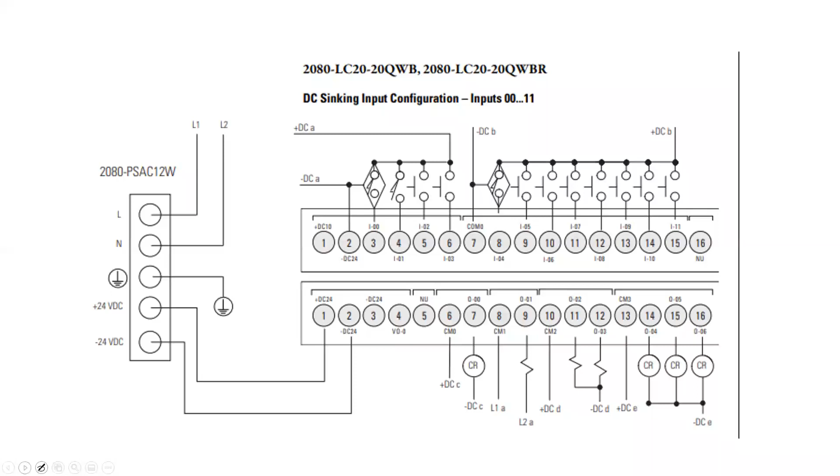Oops, let me see if I can get my pen. That's not nice. Pen will not work on the other side. Oh, there it is. Wonderful. All right, as I figure out where I am on the screen.

All right, so we had to wire 24 volts, right? So we had a power supply, 120 volt AC, and then that meant you had to come into those 2 terminals right there. And that was straightforward. And then on the inputs above, we had the switches wiring up here to pins 3 or pin 2. So what I wanted to talk about is what that really means and the other labs, right? We just left it with that. You wired up one switch, you wired up the power, and away you went.

So let me try to, and now realizing my drawing might be pretty bad here. Oh, okay, I think I see what's happening now. All right, so first lab was pretty straightforward, right? We had an input push button, we called it, I think, start. And we had a stop push button. And then we had 2 outputs. We had, I believe it was like a pump, like the motor starter. And then we had a pump running indicator, right?

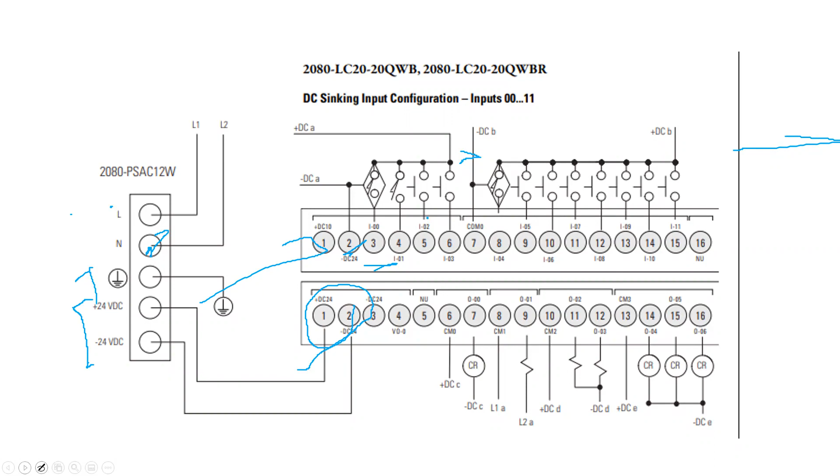Then we had our individual inputs on the PLC, and we had our individual outputs on the PLC. And going back a slide, we were referencing those as simply 1, 2, 3, 4, 1, 2, 3, 4. So I'll use that 1, 2, 3, 4, 5, 6. Now, being that the power was on 1 and 2, I'm going to start this side with 3, 4, 5, 6, 7. All right. I probably could have skipped 1 and 2 there, perhaps.

But 3 is where our first input was on the Micro800. So this start switch would be wired to pin 3. So we would come off this rail, go to the start push button, and wire it to pin 3. Then we showed we had a second push button, which was our stop.

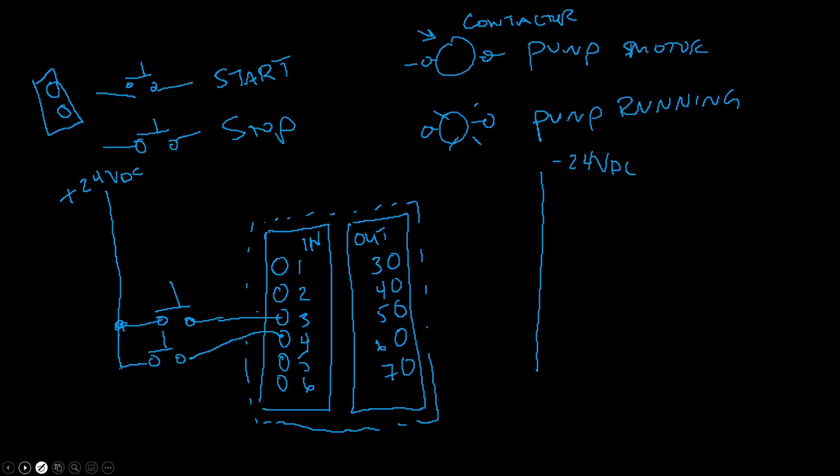Now, we can choose to wire this to any input that we want. Logically, it seems like we would put it to pin 4, right? That's the very next input. It doesn't have to go to pin 4. It can go to any pin you want, as long as you keep track in the program of what it's actually wired to.

So again, if I'm making my schematic, I'm going to label these devices, because at some point this would be a CAD file, of course, and not this horrible chicken scratch diagram. You'd have a CAD file that would show this neatly, and you'd be able to take this out to the panel and look at what's actually wired to the PLC.

All right, now for the outputs, we do the same thing, just a little bit opposite, right? The outputs are what's called sourcing, where the output is sending 24 volts out of the card, and then it's going to go to the negative rail to complete the circuit.

So we would actually come off this terminal 3, and we would indicate this as a coil, since it's a contactor. And then on pin 4, we would come off of here, and we would indicate this as an LED or a light, and we'd come to the rail. So this would be our, I'll call this pump, and I'll call this

run for short, okay? And then the LED, of course, will have a color, so we typically indicate the color inside this circle. So let's say it's a red light. So I'd put an R there to indicate that it's a red LED. All right, so if we were going to really wire this up in a panel, this is how we would have done it. Then the next piece, of course, was what you did in the program.

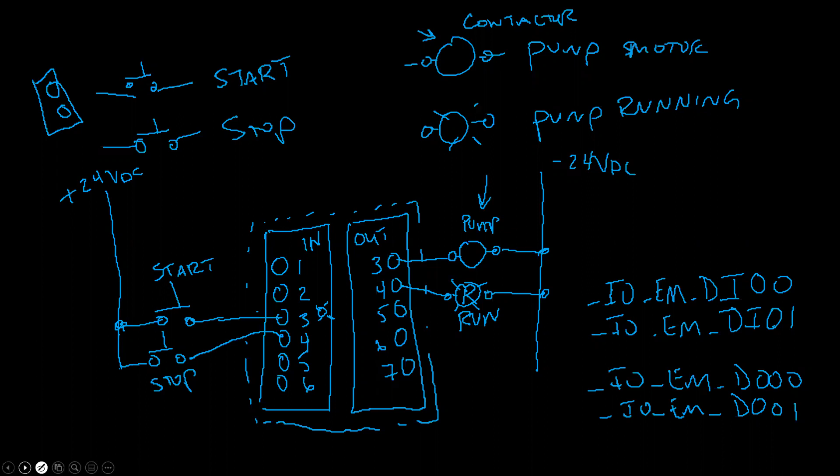Because we just wanted to do a simple pump control situation. So just starting this pump took kind of 4 things, right, in this situation. But that's not all of the story here, right? Because the pump contactor, which is basically this relay coil right here, is just energizing a coil. So we still have to interface that contactor to the motor, all right? So this is, again, what the PLC is doing. And inside here is the magic of the program you wrote, right?

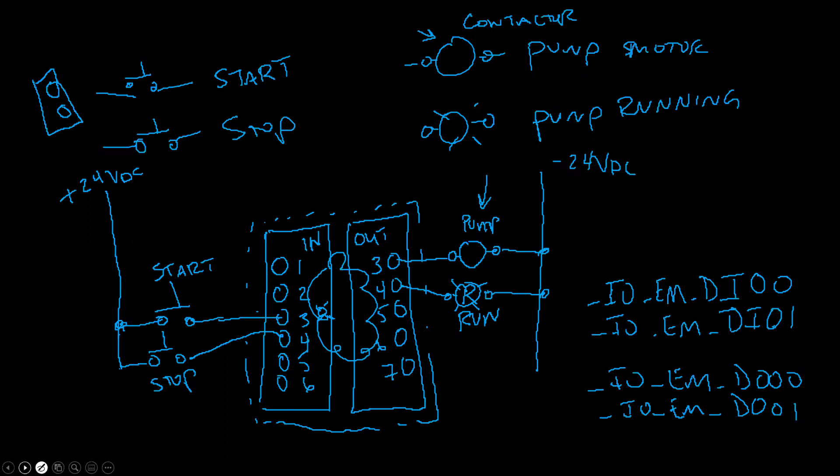But you still have to interface these external devices, perhaps with good old-fashioned wiring, okay? So start and stop push button, there's not much else to do there, right? You just wire a push button in the PLC. The run LED, the run indicator is pretty simple. You're just going to wire it, and when it gets power, it lights up. But the pump contactor still has to be wired to the pump or to the motor in order to make the pump turn. So let me just show you what that looks like real quick,

because it's important to understand. So again, we have a contactor. Typically a contactor has this coil, and I'm going to draw it as kind of a device here, like that, right? So we have a coil, which was going back to the PLC. That's what the PLC was actually wired to, as a coil. But the contactor has 3 contacts on it, and this is used to go to a three-phase motor. So we're basically going to have A phase, B phase, and C phase for the three-phase motor.

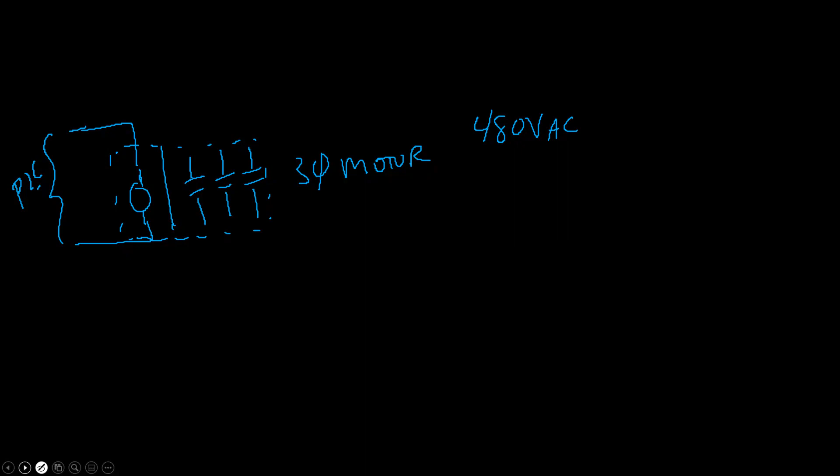Now, let's say the motor is a 480 volt AC motor, and let's say it's got a particular horsepower to it, right? So when we're sizing a motor, we have to pick a motor that has enough horsepower to basically spin the load or turn the load, right? In this case, it's a pump. So I don't know, I'm just taking a number. Let's just say it's a small pump, a one horsepower motor.

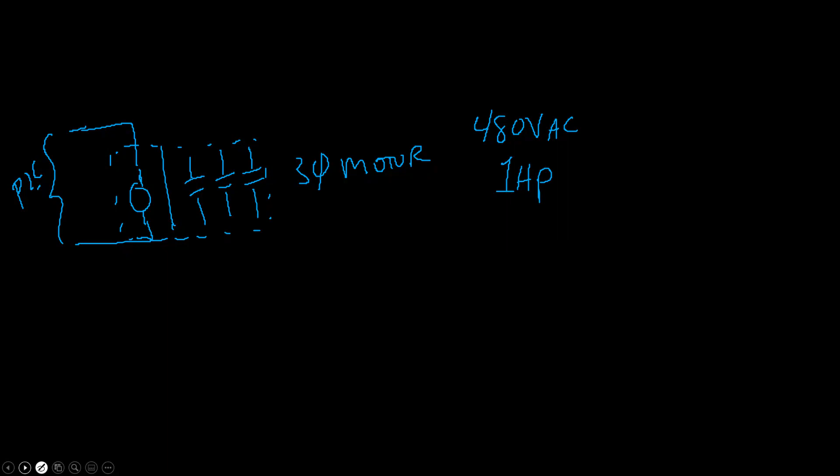And the reason why that matters is because these contactors come in different sizes because there's a current draw. Okay, so horsepower can be related back to watts, basically, which of course can be related back to current. So we have to size our contactor to be able to handle the amount of current that motor is going to draw. If you put in a contactor that's too small, then that contactor is probably going to melt. Those contacts would melt together, most likely.

And if you put a contactor in too large, well, that's not a problem. But then you probably spent more money than you had to, and you put a physically larger device in the panel than you had to. Nothing wrong with that, but it's just oversized.

Okay. So being it's a 480 volt motor, right? This is 24 volt DC on the contactor coil, right? But these contacts themselves are 480 volts. So we would never bring 480 volts to the PLC itself. So if you're sitting here wondering why didn't we just bring that through the PLC? Again, two reasons. One, 480 volt AC, we would not do that to the PLC.

And two, the current draw, because this could be 10, 12, 15 amps. It could be considerably more current draw if it's an even bigger motor. And our PLC cards, those transistors on those PLC cards, typically are rated for a half an amp. So you would blow that PLC incredibly quickly when you turn this motor on. So we have to use this external contactor to do it. All right, so just wanted to kind of show that piece of it.

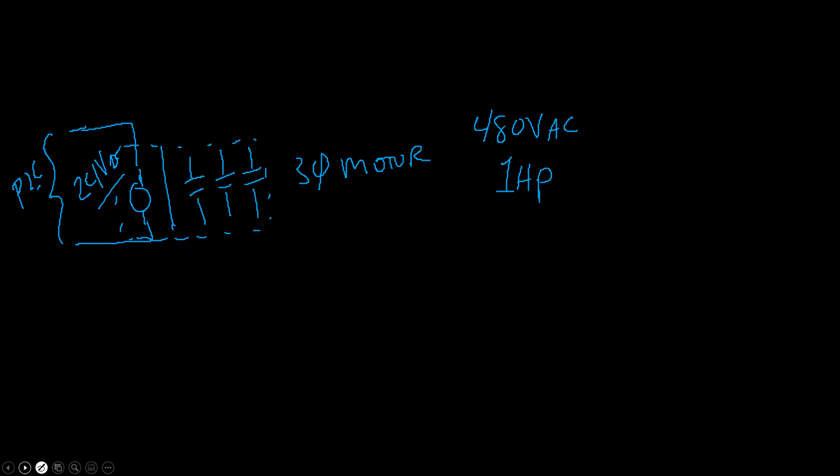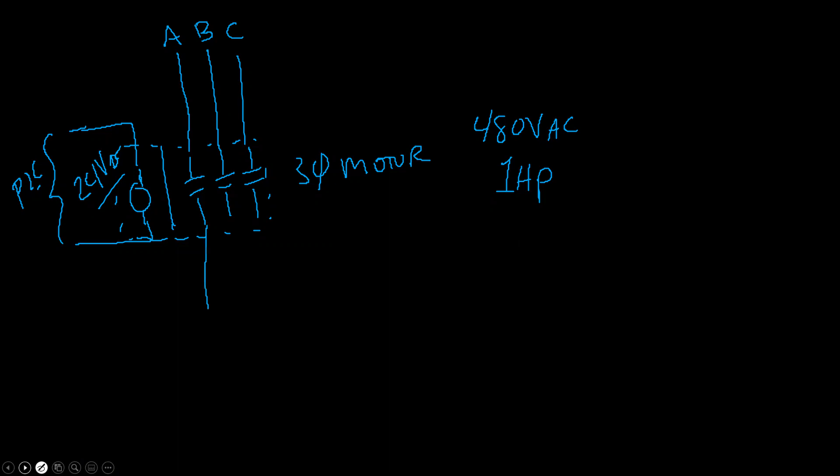Of course, we would have our A, our B, and our C phase come into the contactor. When this coil energizes, or when the PLC told it to turn on, these contacts close, and they're all tied together, so they all close at the same time. And then here, we would come out of the contactor, and we would have a motor. And we typically show the motor as just a circle with an M on it if we're drawing a schematic. And then we would, of course, label this, right?

Whatever it is, motor 1, we'd give it the rating, 480 volt AC, 1 horsepower typically, and we would say 60 hertz, even though it's implied, anything in the United States is going to be 60 hertz, but it's still best to define it when you're drawing this schematic so that we know that it's a 60 hertz system and spell it out. Okay, so from an electrical standpoint, this is what we need to do to make that pump turn.

Now, there's a mechanical piece to this because the pump implies that it's pumping a fluid of some sort, right? So there could be a physical pump attached to a piece of pipe that's going to be pumping some kind of fluid. Typically, as an electrical person, we're not going to be involved in that aspect of it. So that's where a mechanical engineer might come into the project to size the pump properly and to design the piping that would take whatever fluid you're pumping through the system. If you're in a chemical plant, it could be pumping hazardous, dangerous chemicals. Again, that's not really inside of our electrical wheelhouse typically. All right. So again, lab 2. Any questions on that? Just wanted to help show that to you.

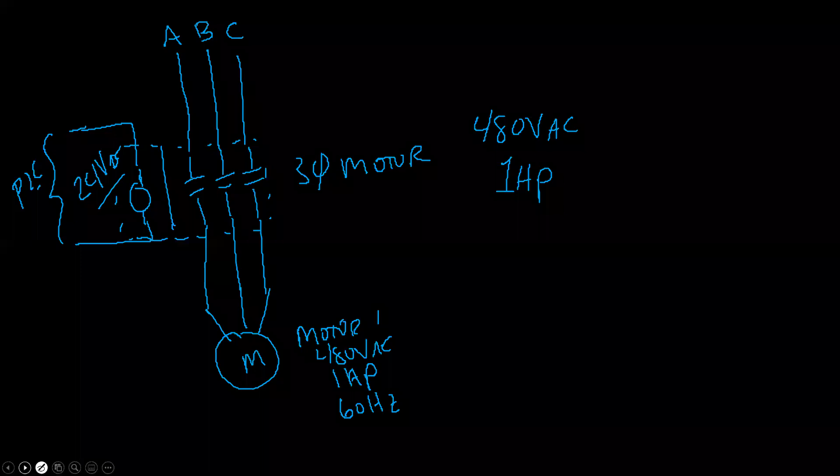Oh, okay. All right, so going on to the last slide, the one we just did. I guess that was Thursday night, right? Today's Tuesday. So that one was a little different in that we didn't have a motor this time. Well, I guess we did have a motor, because we had the belt, the conveyor belt motor. In that case, the conveyor belt motors are going to probably be very small motors usually.

If you're driving like a belt, like on a big grain elevator, if you've driven on River Road and you've gone under the grain elevator, you see those kind of belts that bring the grain out to the barges or ships on the river. Those are going to be pretty large motors driving that belt. But if you're thinking about a conveyor belt that's inside the Amazon warehouse moving packages, those motors wouldn't necessarily need to be that large.

But in that case, we had several different inputs, right? We said we were going to have a photo eye sensor, so I'll call it photo eye 1. We had a photo eye 2. Then we had a start and a stop for the conveyor. And then of course we had the conveyor motor, and I don't remember everything we had, but probably had a light. I'm sure we had an indicator of some sort. Okay.

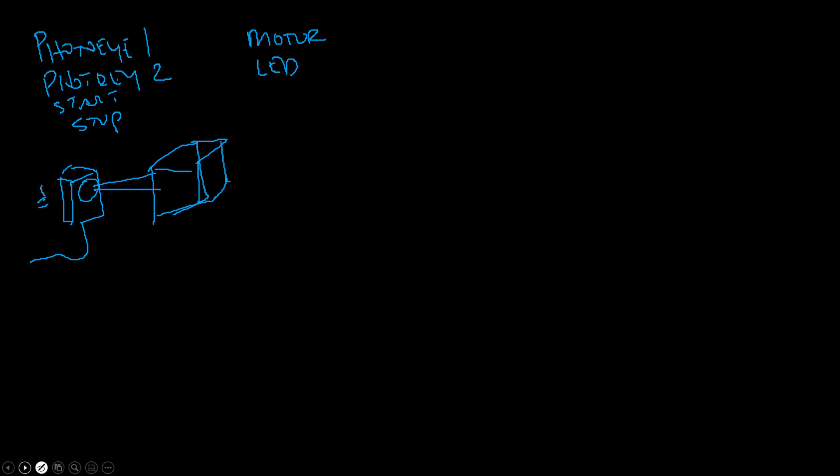So for the photo eye, a photo eye kind of looks like this. You have a little kind of light sensor, and you have a kind of cord going off, right? It has a little light beam going out. And if the box breaks the light beam, then again, there's a set of contacts inside of there. The contacts close, and there's 2 wires coming to the photo eye, right? So an in and an out, right?

So that was the contact closure, and that of course is what we would be wiring to the PLC, so that when the box comes by the photo eye, it detects it, the little contact closes, and then the PLC sees that as a high signal or a 24-volt signal, and therefore shows it as a 1 inside the PLC, right? So our wiring diagram would be exactly the same, right? We would show the inputs and the outputs, right?

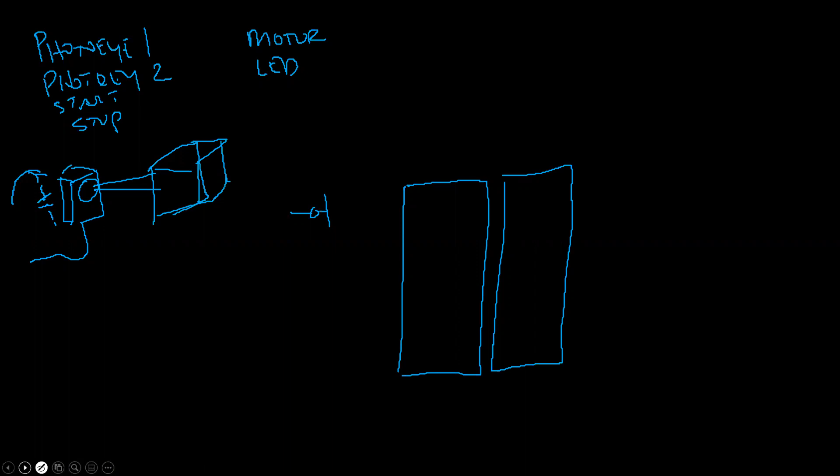Now in this case, we would draw it one of two ways. We either draw it as a contact like that probably, or we could also show it as a switch maybe. We wouldn't show it as a push button, right? Remember, we have these standard symbols, right? That's a push button symbol, not drawn very well. And then remember we had some other symbols, right? We had a float switch. We had a flow switch. We had a pressure switch, and then we had a temperature switch, right? So it's important to understand and recognize these standard symbols.

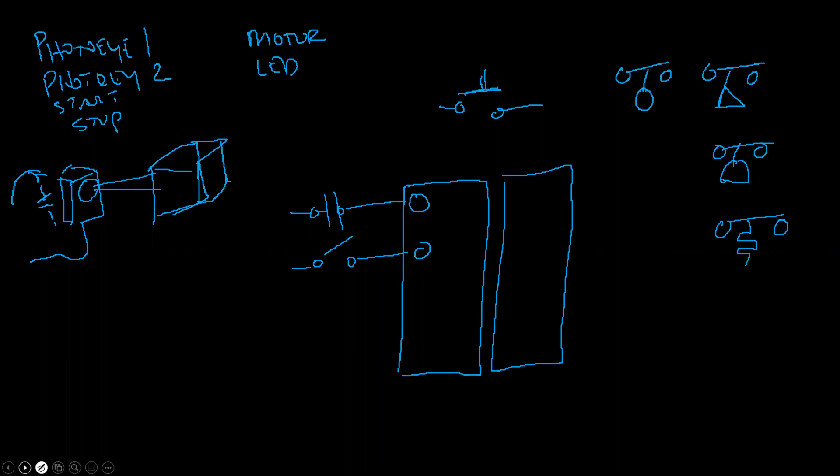There's an organization called ISA that publishes a lot of standards for the automation world. And these symbols come from an ISA standard. I think it's ISA 5.1. So all these schematic symbols are standard. So it's important, again, standardization, because no matter where you work, you can pick up a drawing and hopefully they're using standard symbols so everybody can recognize. Just like speaking English, it's just a way to make sure we're all kind of using a common language, so to speak.

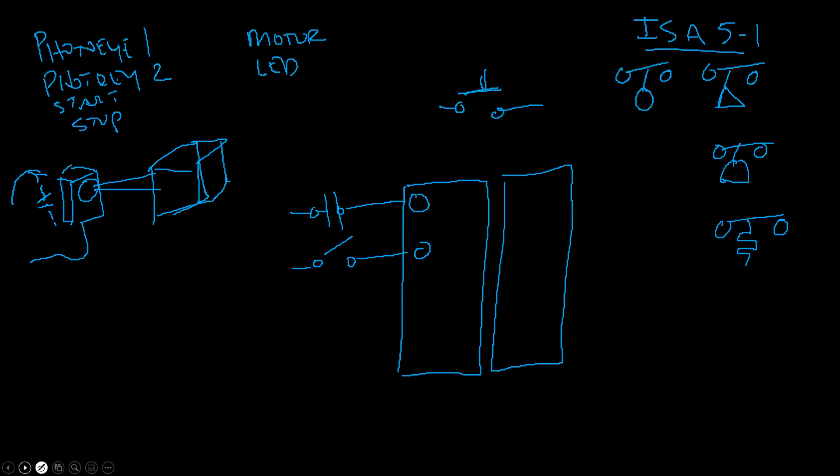So for the photo eye, I don't know if there's a standard symbol for a photo eye, I have to look that up actually, but it would probably be drawn as either a contact closure or potentially as a switch, possibly. Then again, 24 volts plus, right? So this is actually a 24 volt power, right? So 24 volts would come into the photo eye, right?

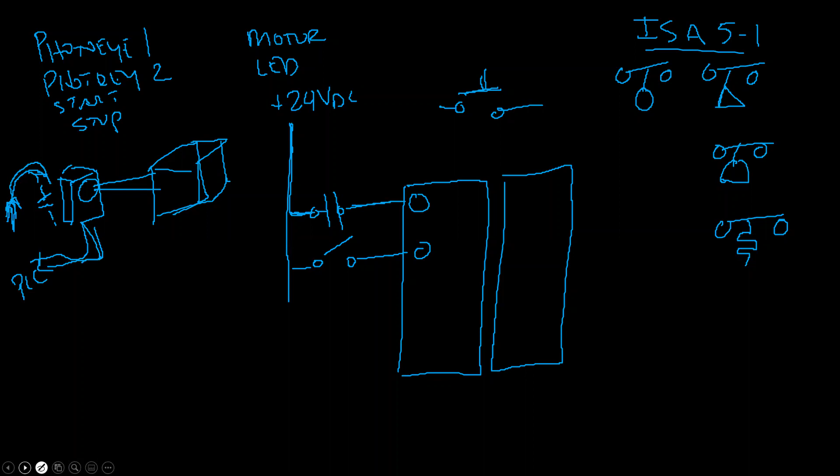And then when that contact closes, this goes to the PLC, right? So that's this wire here. And then that is that wire here, right? So that was 3, 4. And then we had our start and stop. So we would draw that as a traditional push button.

And of course, very important to label all these things. And then same thing on the outputs, right? We would come to our motor contactor. We would come to our LED indicator, right? And this would all be tied to the minus 24 volt DC. All right. Oops.

So even though I said earlier, it's a conveyor system, it's a smaller motor, it's still going to have some kind of a contactor to turn it on. Now, that's assuming the motor is simply an on-off motor, right? So in the idea of the pump back there, there was really no variation. We were kind of treating it as a discrete device, right? It's either on or it's off. And that means that when we turn it on, it's at full speed. And when we turn it off, of course, it's stopped and there's no in between.

Of course, in the industrial world, we have the ability to control the speed of the motor with what we call a drive. So, not all applications are simply turn the motor on. In many cases, in a simple application like a fan or a pump, it might actually be, just turn it on and it doesn't really matter the speed. But in situations where you're trying to do tight control of something, then you might be varying the speed of that pump, because you might need to vary the pressure or whatever, the fluid. So in that case, you wouldn't be using a contactor, because again, contactor means that it's either on or off. Again, it's a discrete device.

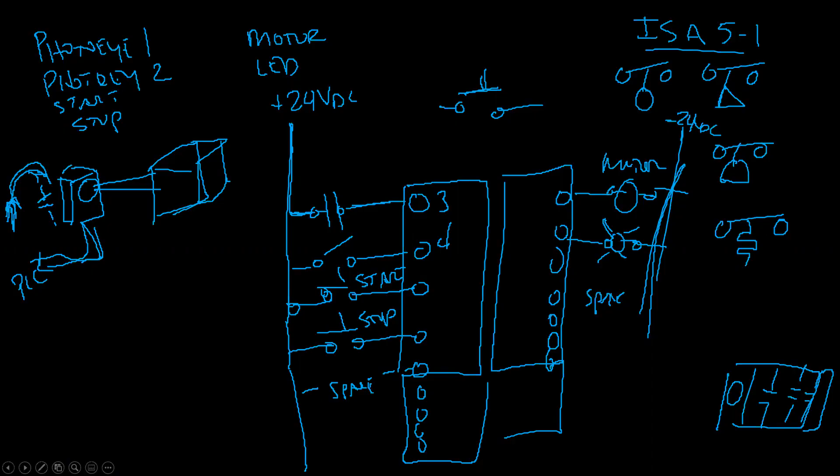Let me now switch gears. So what's going to happen on Thursday? We are going to start on the Siemens S7-1200. So let me introduce that PLC a little bit to you. And I'm going to show you the TIA Portal. And then we're going to pretty much do the same labs we've been doing with the Micro800 as far as the programming of those labs. Just that now it's going to be a little bit different, right? So the ladder logic's the same, but the way Siemens references things and the way Siemens uses their instructions, it's just a little bit different, right?

This is unfortunately where things between different manufacturers are very similar, but yet also very different. So every manufacturer is just a little bit different in how they do things. But again, ladder logic or ladder diagram is a standard language. So the ladder part doesn't change any. The ladder logic that you've been doing doesn't change. Just you'll see the addressing we use and those instruction blocks are going to be a little bit different look and feel than what you just learned in the Micro820. All right. So the Siemens S7-1200. If you remember, we talked about micro, small, and large controllers. This is what I would consider a small controller.

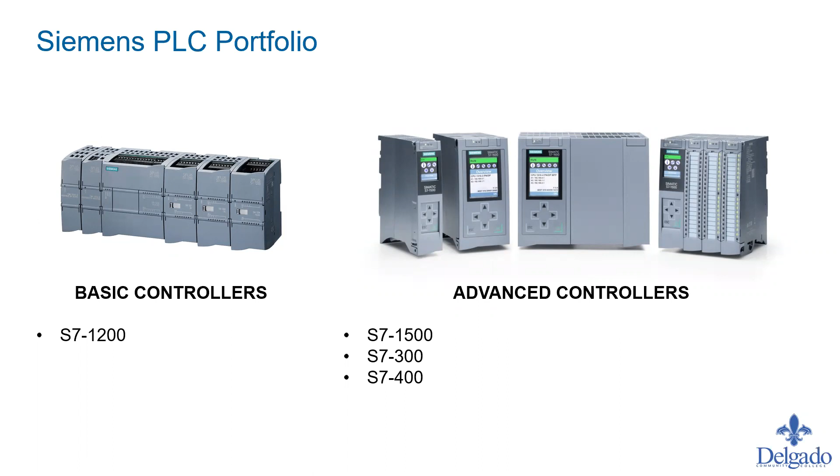So you're going to see a lot of similarities. Once we get into software, it's going to look almost identical to what you're used to. If you remember, in CCW software, you had to choose your controller type: the Micro810, Micro820, Micro830, the 850, and the 870, right? It's gonna be the same thing here. You choose the class, and underneath the 1214C there are actually 3 or 4 different catalog numbers or permutations. So you have to make sure you choose the right one, just like you did with the Micro820.

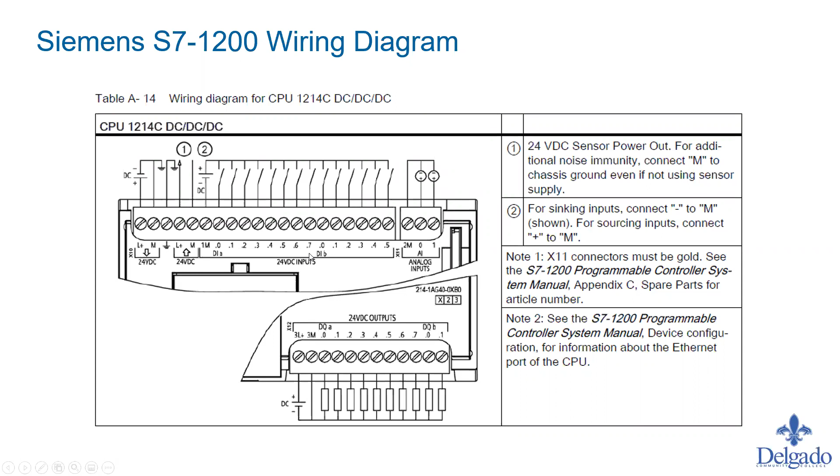So where it starts to get a little different, I guess what I'm trying to say here is that the Siemens system is going to be a little bit more sophisticated as far as programming organization. So we have this OB main, and then the OB main will be calling these function blocks, and then this function block can call additional function blocks or subroutines. So you start with a main routine, and from there you'll call your subroutines in the system.

What we just did with the Micro820 is you just create a program, and you can create multiple programs if you want, but basically each program just executes. Here you can control that program flow by calling the subroutines to operate.

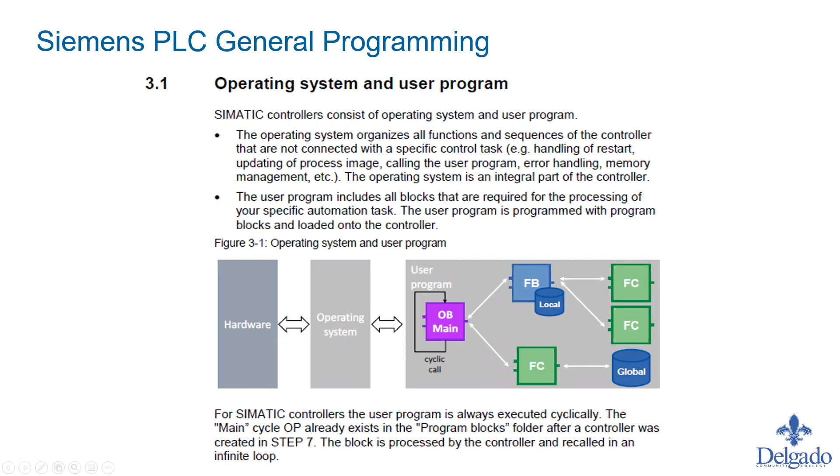So the supported languages, just like the Micro820, this was a ladder diagram, function block diagram, and then here's something new called structured control language. And then they also have in the 1500 the graph and statement list. Certain things just don't translate, because remember Siemens is a German-made PLC, so their terminology is just a little bit different than what we're showing here in the Rockwell stuff. But ladder diagram, of course, is the same.

Function block diagram is the same, but then these other three have a little bit different nomenclature from what we were shown before, but they're going to be very similar. Now, again, we're using the ladder just to keep life a little bit simple in this class, so we're going to be sticking with the ladder diagram. And in this case, they'd say LAD. In the Rockwell world, it was just LD.

All right, so OBs, organization blocks, are the interface between the operating system and the user program. So don't worry about some of this definition yet, but just know that there's going to be these kind of terms when you're in the software. They'll use these little acronyms like OB and FB, so I just want to define these things for you.

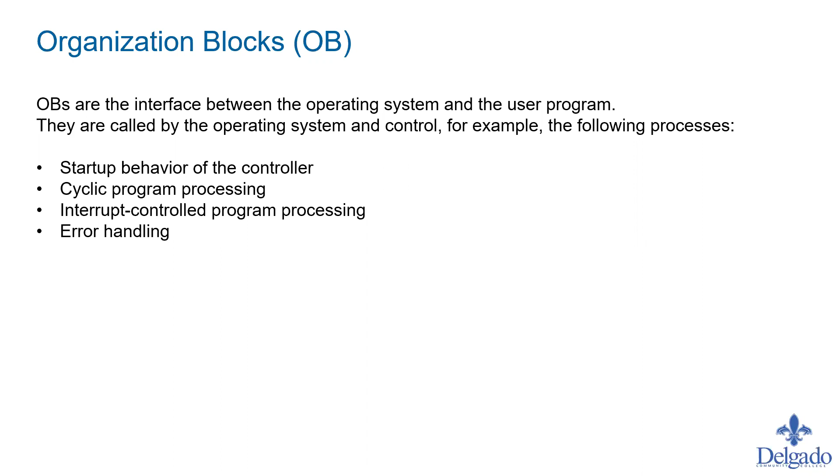All right. So in this case, the main one, OB1, is what executes first, and then it might call a bunch of subroutines. When that's done, it'll go down to this main X, OB200. It might call a bunch of subroutines. When that's done, it'll go down to this main Y, OB300. It might call a bunch of subroutines. And once it's finished with that, it's going to go back up to the top.

Now, we're not necessarily going to create this every time. We'll probably just stick with just one main routine, but just know that it's sophisticated enough to where you can have multiple programs, and each program calling multiple subroutines. Just know that, again, this will execute first and go and do all this. Then it'll execute this and go and do all this.

So your process time, your sweep time, can be impacted by how many of these separate routines you have and how many calls to subroutines you might be trying to do there. Again, for our lab assignments, we're going to be writing just a few lines of code, but a real world program could be much more sophisticated than what we're going to be doing in the lab.

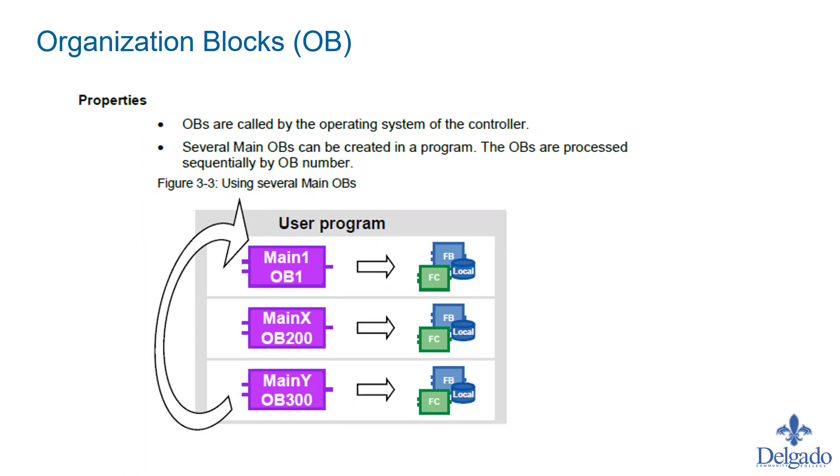Now, here's where it starts to really get a little bit different from what you've been used to. In the Micro820, we were doing that embedded, right? So we had that _IO_EM for embedded, DI 00, whatnot. Here we're going to have an input memory table. We're going to have an output memory table, and we're going to have the M and the L and DB down at the bottom there. So we have some additional memory tables that we can utilize inside the controller.

So to access the input memory table, we're going to use %I. The I indicates that we want to read or look up out of the input table, and we use a % sign in front of that I to indicate basically a lookup, and then you're going to give it an actual address in the memory table. And for the outputs, we're going to reference it as a Q. So we would say %Q and then the address.

If we wanted to use the bit memory, the M memory space, we would use %M and then the address. I don't think we're going to mess with the L and the DB memory space, but just know that there are some additional memory spaces that are available to you.

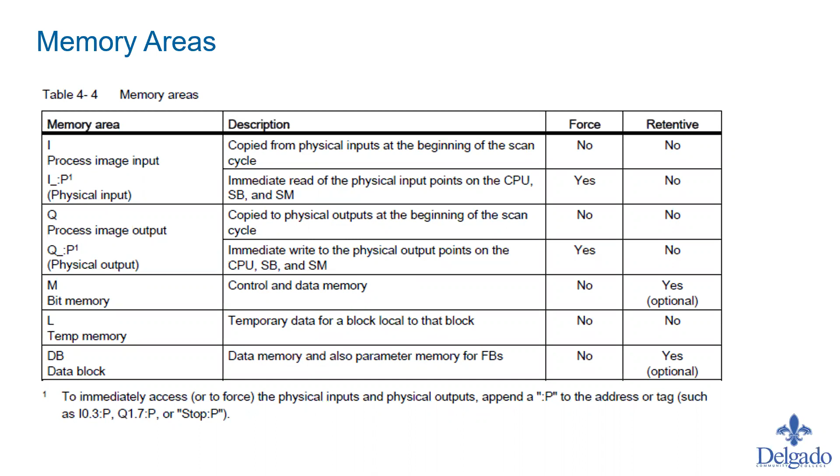So the way to think about this now is it's going to be organized in rows of data, and it's going to be byte aligned, meaning that we'll have bytes, so 8 bits in a row, and then we'll move on down to the next byte. This is byte 0, byte 1, byte 2, byte 3, but this is bit 0.

Now, whenever we're doing microprocessors, 0 is always the one on the right, and then we go from right to left, because this in the binary number is the least significant digit. And this over here in a binary string would be the most significant digit. So we typically read these tables from right to left. So this is bit 0, bit 1, bit 2, 3, 4, 5, 6, 7 out of byte 0.

All right, so we're going to be referencing these memory spaces based on the byte and the bit. So first we would give it an indicator. What's the memory area identifier?

Right? So they show M in this example. So this would be the internal memory space, %M. And if I said %M 3.4, that means that I'm going to be looking for whatever is in this memory space right here. So here is byte 3, and bit 4. All right. So it's just a matter of keeping track of where you're putting things.

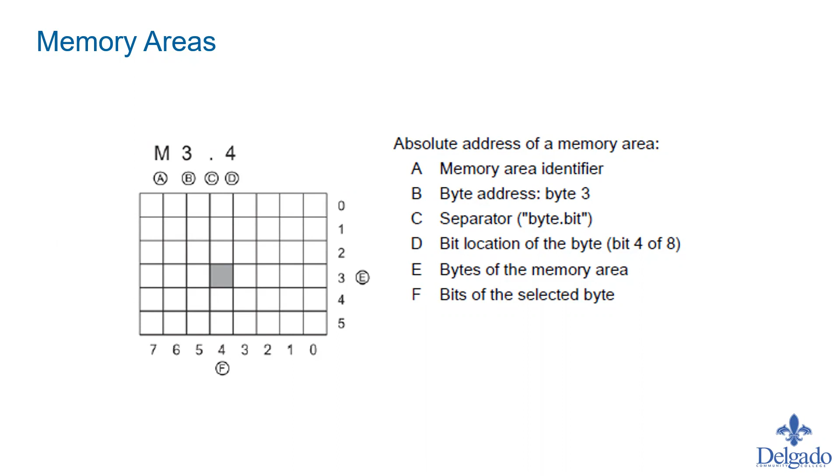I can also do the same thing for word. A word length is 16 bits. And then D would be a double word. So if a word is 16, then a double word would mean 32 contiguous bits. I could reference that. So if you're not that familiar with the computer terminology: 8 bits are a byte, 16 bits are a word, and 32 bits would be a double word.

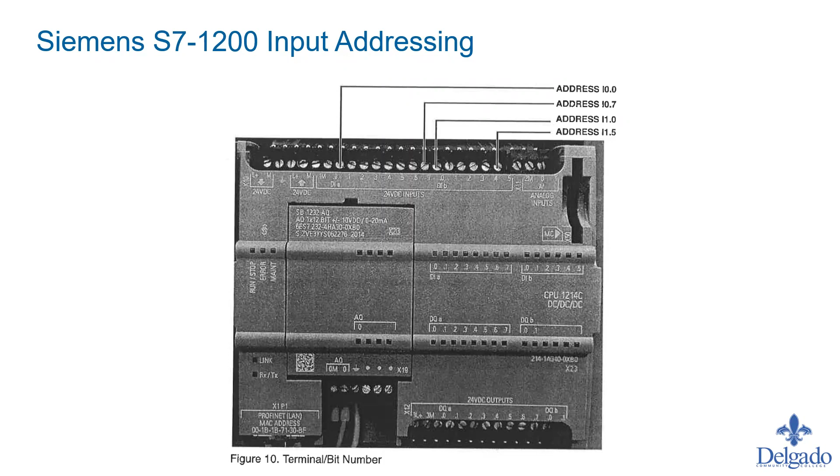They couldn't be nice and say PB0, PB1, PB2. They use normal numbering for the push buttons, but in the PLC it is of course computer numbering, 0.0, 0.1. Same thing on the outputs. There's a bunch of lights wired on the trainer stations, DO0, DO1, down to DO7, that you can use in your programming labs.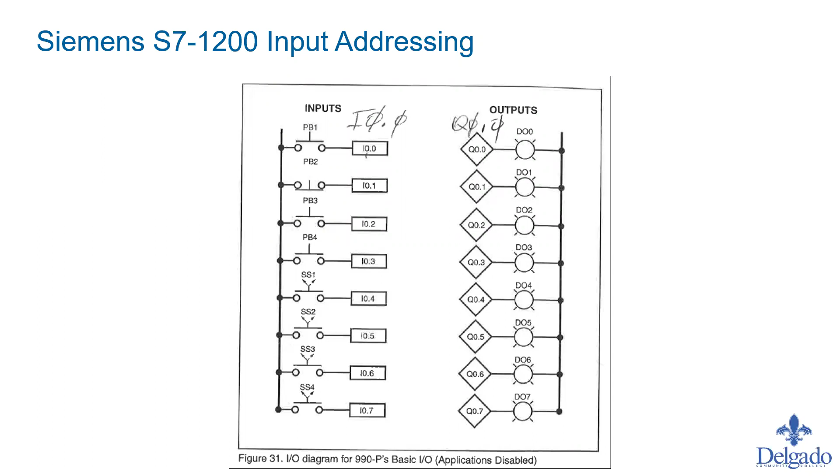All right, so how does this part look different? Again, the ladder diagram is identical, right? So here's our good old tried and true latch circuit. We got a start push button, we got a stop push button, we've got something running, such as a motor or whatever, and then we're latching it on itself.

The difference is in the Micro820, we had to say IOEM DI 00, IOEM DI 01, IOEM DO 00, right? But now we're going to be using those memory spaces we just talked about. So the start push button is going to be %I0.0. The stop push button is %I0.1. And our first output is %Q0.0. So that's how we're going to address these things.

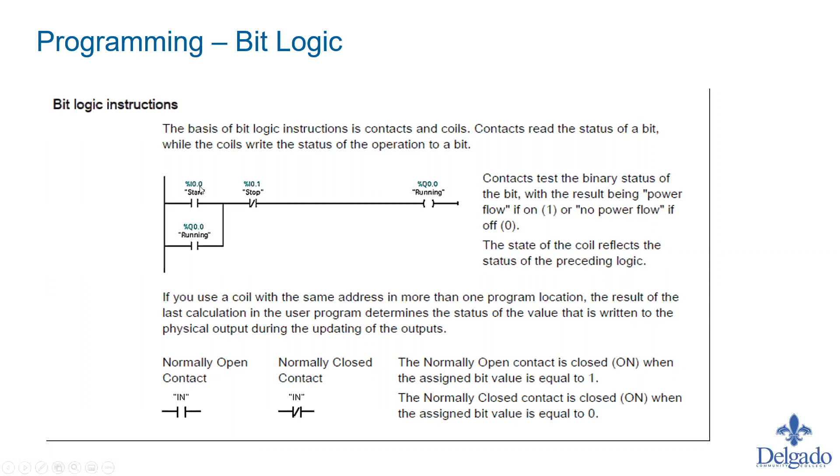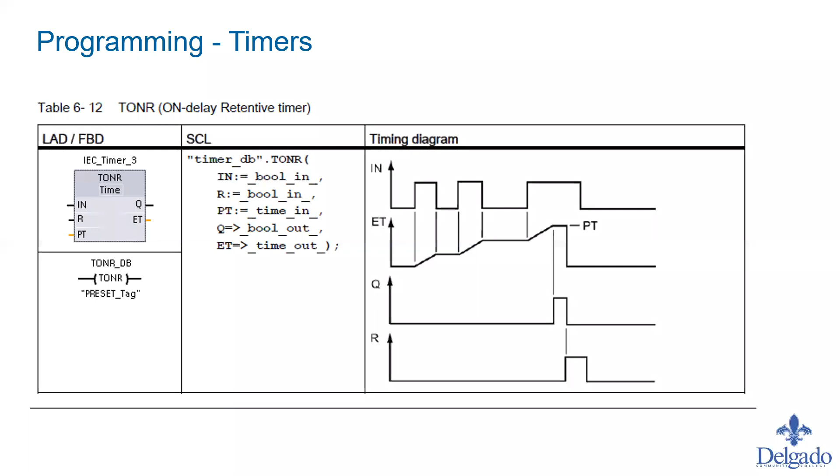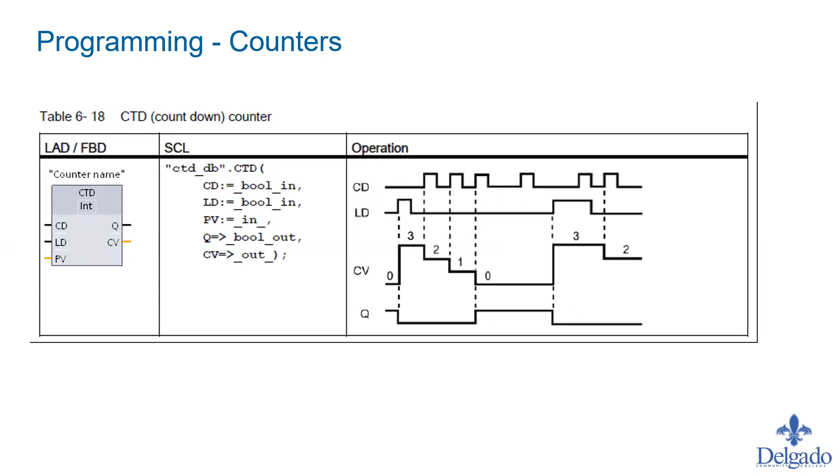Now, when we get into analogs, probably next week because we haven't done analogs yet, we will have to talk about scaling and normalizing the analogs. I won't do that tonight, but we'll talk about what that means before we get to that lab. There's a block in the program that we can use to scale. Scaling means that once the value of the analog signal comes into the PLC, it's in a word format, and we'll have to convert that to an engineering unit.

Because the number it comes in as isn't a usable number. It's going to be based on 2 to the 15th power, so you have to convert it back to an engineering unit. For instance, if it's in PSI, you need to put it into whatever the PSI scaling is for that transmitter. We'll talk more about that in detail before we do the lab.

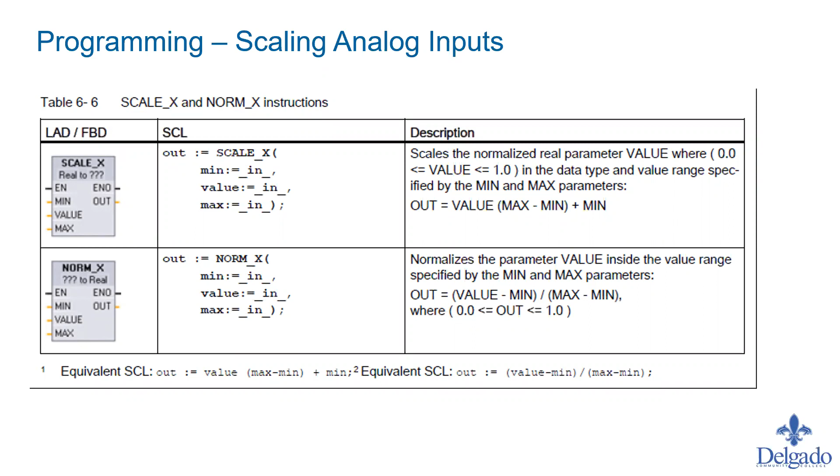Okay, and on Canvas, there's a whole bunch of Siemens references. If you'd like to study up a little bit, there's the user manual, there's this easy book, a lot of documentation from Siemens themselves. You can look through that book a little bit before you go.

But now we will once again tempt fate with technology on a live Zoom, and I'm going to open up the software that you will be using in the next lab. For the Rockwell Micro820 it was called Connected Components Workbench, or CCW. I like to have these little acronyms.

The Siemens uses what's called the Totally Integrated Automation portal, or TIA Portal for short. So even though it's a different look and feel, it's essentially the same thing that you've just been doing with the CCW software.

So of course we can open an existing project, we can create a new project, you can do a migrate. You can also do a welcome tour, so if you want to thumb through here, it'll show you around the software a bit. We're going to go create new project. Have a project name, path, default, the version. We're using 15.1 version software. And if you want to put a comment in here, you can do that. And we'll say create. So this will take a moment.

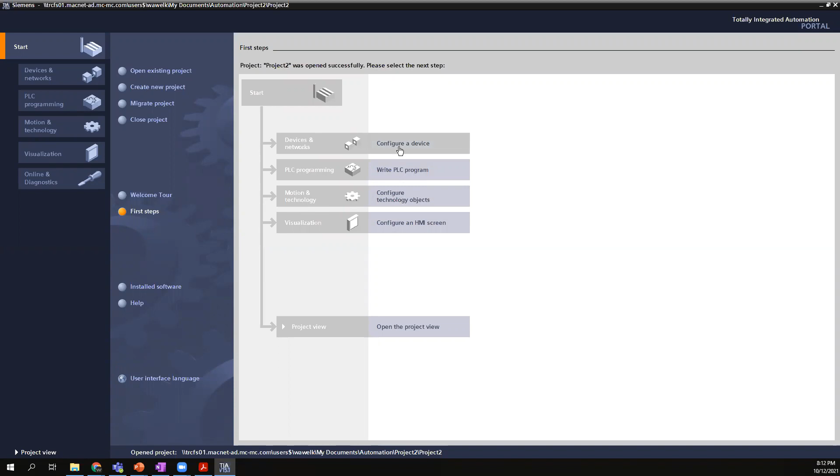But just like we were used to in CCW, we have to tell it what it is we're going to program. What are we going to do? So we want to configure a device, and when we configure a device, we will come to add new device. And you'll see that we have several options. We have controllers, we have HMIs, we have PC systems. So just like CCW software, you had multiple things you could have chosen there. But we're going to stick with controllers.

And as you can see, we have a lot of options. We got the 1200, 1500, 300, 400. We are using the S7-1200. So if I expand that, and then CPU, expand that, then you see we got a lot of options here. They got the 1211Cs, the 1212Cs, the 1214s, 1215s, just like we showed in that chart. But then to make life even a little more complicated, each one of these has multiple options too.

So we got the 1211C AC/DC/relay, RLY stands for relay. We've got the 1211C DC/DC/DC. So this basically talks about the different types of models. AC means it's an AC power supply, DC means it's DC input, and the third, RLY, means the type of output. So a DC/DC/DC would mean DC powered, DC inputs, and DC outputs. So that's how we can decipher that real quick.

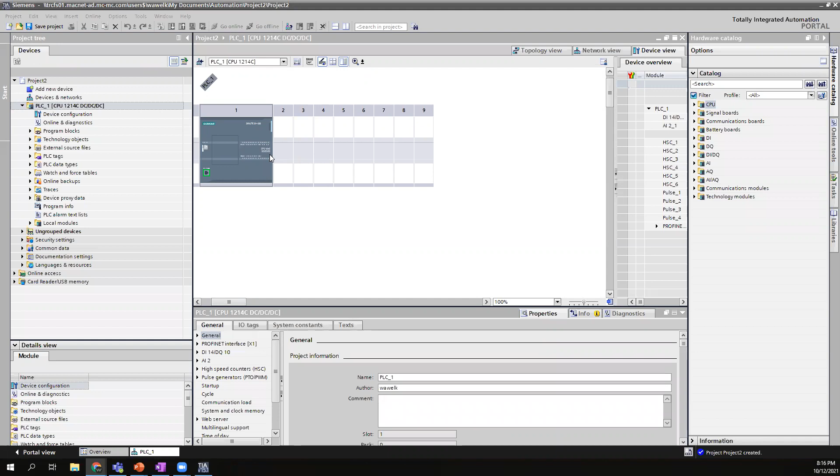Let this kind of go here for a moment. All right. So again, they are very similar in the look and feel. This looks very similar to what happens when you first open up CCW. It kind of gave you a little visual depiction of the PLC you had. So this is just a nice little visual indication that, yes, this is what my PLC looks like. If it was longer or something, you would know that maybe I didn't pick the right one. So just a quick little visual.

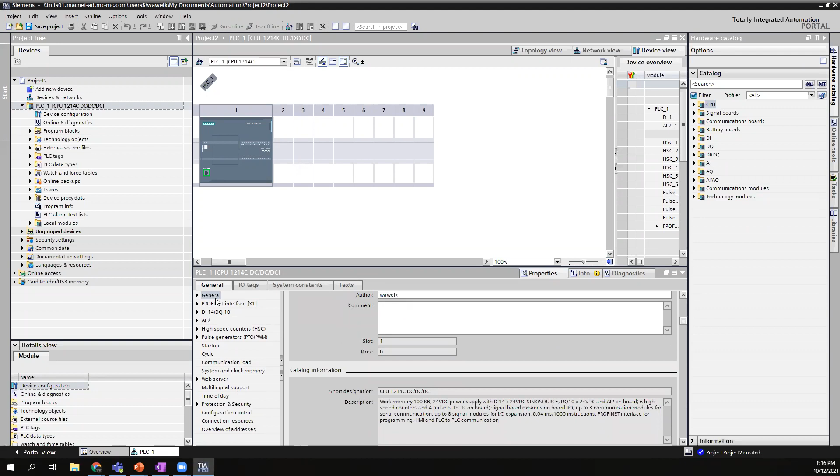Just like in the CCW software, you have all your properties down here. General, again, so remember Profinet here, Profinet will mean the same thing as Ethernet. It's just their protocol. So if I had to change my IP address on this PLC, I would actually come under Profinet and Ethernet addresses, and then I can type in my IP address right here.

Each station, so now we're going to move into the world where the PLC will actually have an IP address that is defined and static. It's not going to be fluctuating every time like it was with the Micro820 PLC. So every station will also be labeled as the IP address. So when you create a new project, it's going to probably have a default IP address that it just picked. For me, it picked this.

So it will be important to make sure that you put in the IP address here in the project that matches what is on the station itself. That way you can get connected to your controller. We'll remind everybody about that on Thursday night too, but just note we'll have to actually type in an IP address this time. We didn't really do that with the Micro800.

So the rest of the configurations are kind of all hiding down here. We can look at our inputs, we can look at our analog inputs. We have 2 analog inputs. So when we get to the analog, we'll probably have to come here and mess with this a little bit. So we'll do a little bit more configuration than we typically have been doing with the Micro820 in this PLC. A little bit, but not a lot.

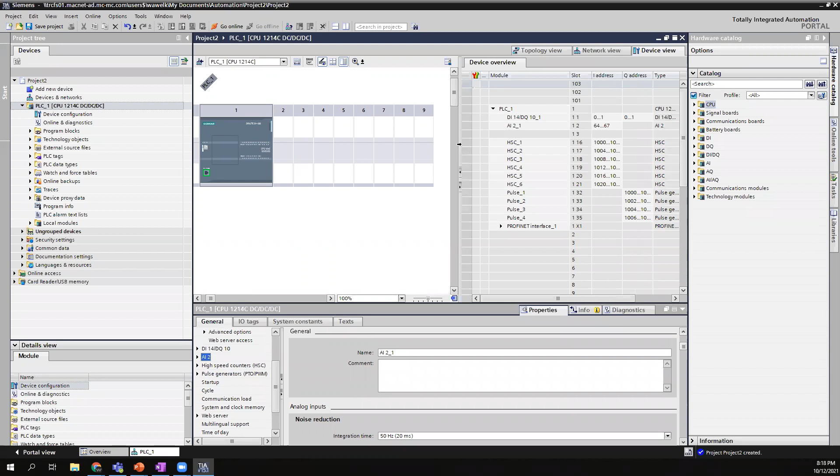Then we can kind of see here a very similar looking kind of IO table. They call it device overview. And this is just kind of showing our addresses. So we're using DI14, and we're using Q addresses 0 to 1. Our analog is using 64 through 67.

So this is just letting us know how we're going to actually reference some memory spaces, right? So we can actually change this if we wanted to, and it tells you what your valid range is. So if I don't want my analogs to be between %I64 and 67, then I can actually adjust that in this chart.

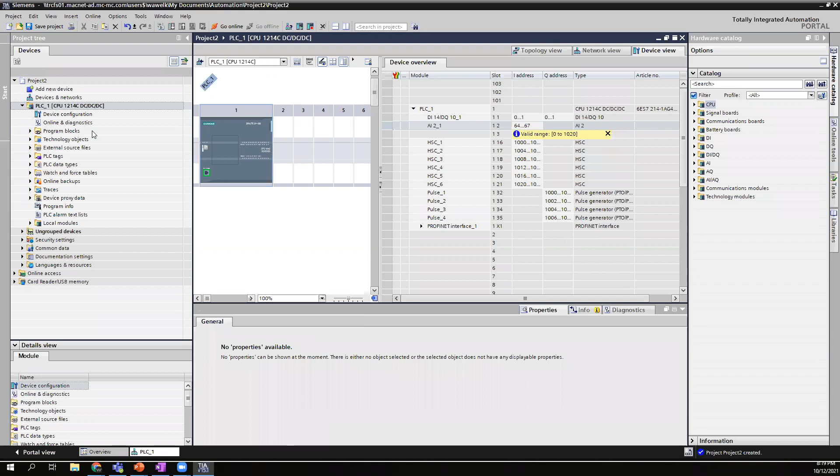So at this point, the only other thing you need to really do for our first labs is we're going to go to program blocks. So you see we probably have a lot more options here underneath the navigation tree. But we only really need to worry about the device configuration, which is kind of where we are now, and the program blocks for programming.

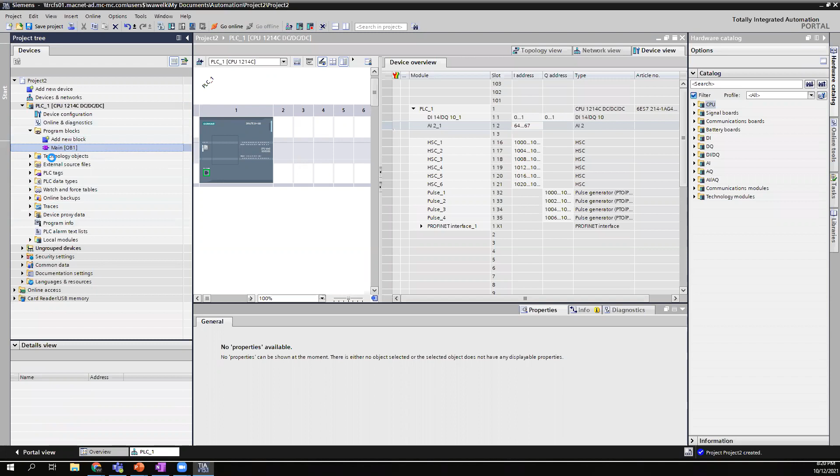Now we have the main OB1. So kind of what we were trying to show in the slides earlier, we have the main routine OB1. So I can double click on main. And the main routine, as its name implies, is the main routine, meaning that that is the routine that will always execute first.

Okay, so for our simple lab programming exercises, we're just going to go right into the main and add our code. If I wanted to make subroutines or additional programs, then I can say add a new block. If I did that, I need to double click. If I double click on that, I give it a block name, and then what type of block is it going to be? Is it an organizational block? Is it a function block? Is it a function? Is it a data block? And then I choose what language I want it to be: ladder, function block, or SCL, right?

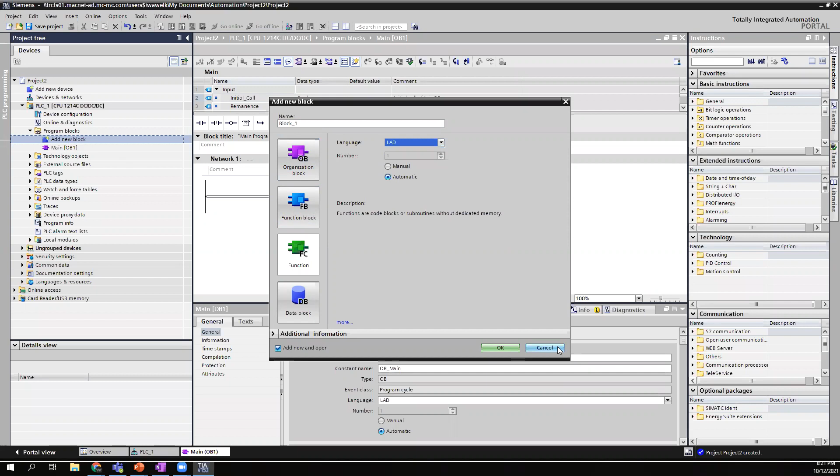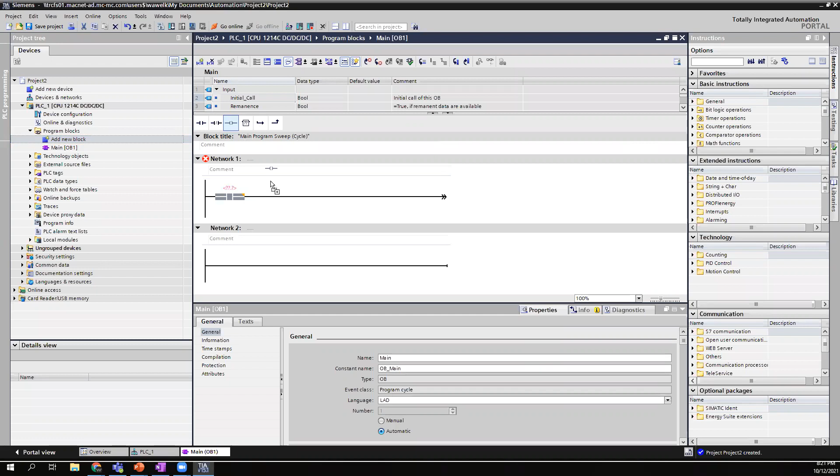So again, we don't need to create a new block. In this case, we already had the main created for us. And then you will basically create logic, just like you've been doing with the CCW. You got your elements here. So I got my normally open contact, my normally closed contact, and I got a coil. So I can bring my normally open contact down here. I can bring my coil right there.

Okay. And now I was able to build this without addressing anything, but it has a red and it has question marks. So at this point, I would double click, and there's going to be no pull down in this case. So what I would actually need to do is address it just like we've been talking.

I'm going to put a %I0.0, and that will tie that contact in the program to the first input memory space. And then over here on the coil, I'm going to go %Q0.0. And I hit enter, and that'll tie the coil to the output memory space.

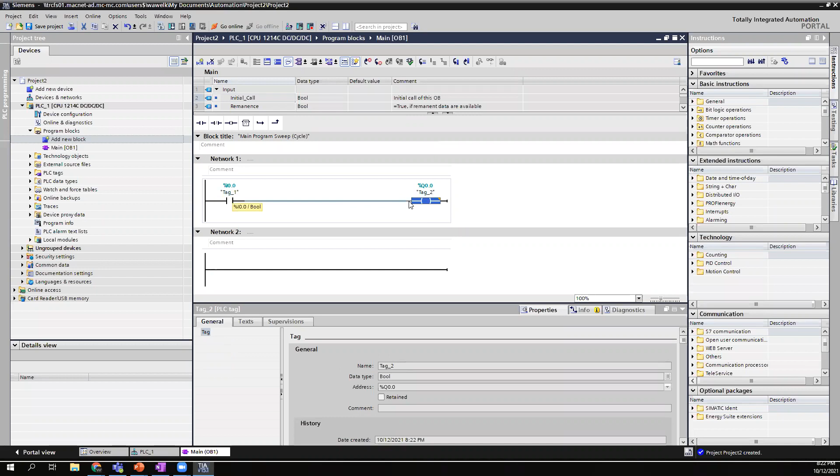Now notice how it just started creating these tag 1, tag 2 terminology. It just kind of automatically did that. So the other thing we might do here is you go to your PLC tags, and we can say show all tags. And then here's tag 1 and there's tag 2. And we see that it is a Boolean, and it is addressed to %I0.0 and %Q0.0.

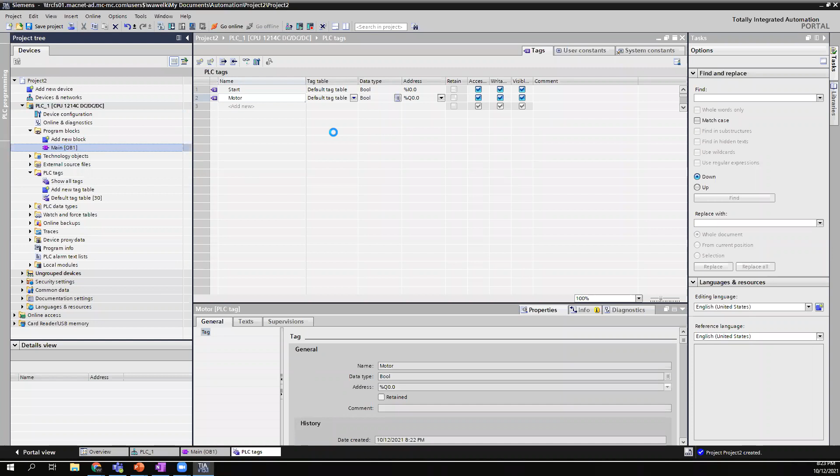So if I wanted to change this, I can do it right here. So I can make that my start, and I can make this my motor, right? And if I go back to the program, that should have updated. All right. So pretty much the same, little different, some nuances to it that you'll have to just kind of learn.

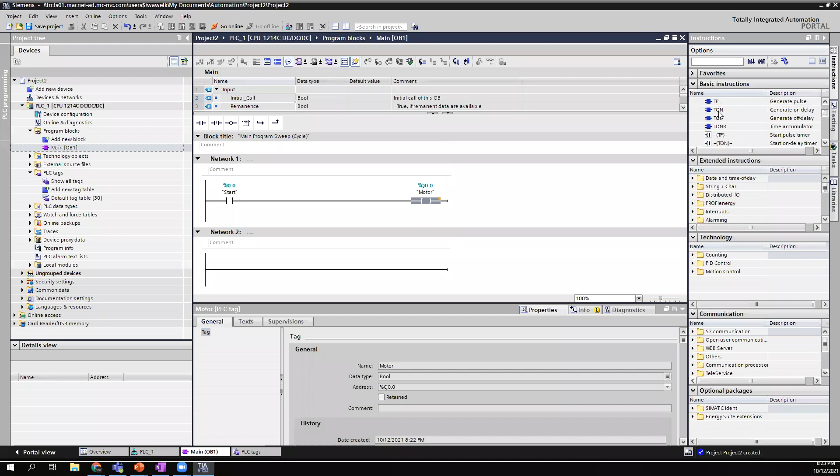There's all the timer instructions, counter instructions are all over here, right? So if I wanted to add timers and counters, I can find them over here and basically drag them over onto the rung, right? And then give it a name and hit OK. Just took the default in this case, right? So this is what we'll play with on Thursday night.

Of course, the next trick is getting connected and downloading to it. That's something I can't do right now just because I don't have a system to connect to. So we'll go there on Thursday night. But basically, it's going to be going online, and it's going to be very similar to the first time that you connected to the Micro820. You had to give it a path. It has to know the path.

So Siemens software has a similar tool that will check all the things that are connected to the computer, and then it'll find your PLC hopefully, and then you can highlight it and choose to connect. And once you do connect, it'll ask you, do you want to download the program? Just like the Micro820, you'll say yes. Do you want to run the program? You say yes. And then you'll be able to monitor the code executing just like you did in the Micro820.

So I think the transition shouldn't be that hard, but again, we'll actually do it for real on Thursday night. And I think that's pretty much all I want to cover tonight. Probably a little bit longer than I had intended, but that's probably why I figured we'd do Zoom, since I figured it'd be short and sweet versus having to make you come out on campus.